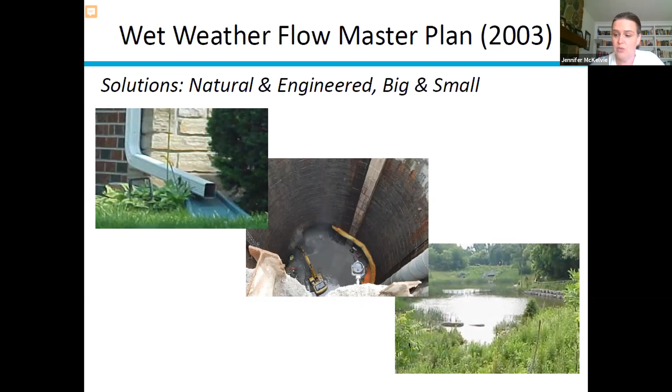In terms of the measures, I mentioned they're on a wide variety of scales. At some of the more localized levels, some of the things we're seeing are mandatory downspout disconnection. Downspout disconnection is mandatory citywide unless you can get an exemption on the basis that it would create a hazardous condition or is not technically feasible. That approval would be through the general manager. The bylaw is applicable to all buildings, including residential, industrial, institutional, and commercial.

I can tell you all of the houses in my community, we've all done that. I've done it as well. I still need to move one of my eaves troughs though, because every winter the mailman puts a note saying, can you please remove the ice that comes out of your eaves trough? So that was the one downside of it, we still have some work to do on that, but everybody has disconnected.

The second is the wet weather flow management guidelines. So there are guidelines that set out objectives and requirements for stormwater management for new and redevelopments, including looking at the water balance, water quality, water quantity, among other things. And this is incorporated into the Toronto Green Standard. And we can't set building codes, but we do have standards, and we do try to really encourage full adoption of those.

We have the Green Street Technical Guidelines. So Toronto's Green Street Guidelines provide guidance, standards, and selection tools for the planning, the design, the integration, and the maintenance of our green infrastructure options appropriate for the city streets. And there is an example here on the bottom of a rain garden, and these are sorts of installations that we're putting throughout the city so that we can start to retain waters rather than having them run off into the sewer system.

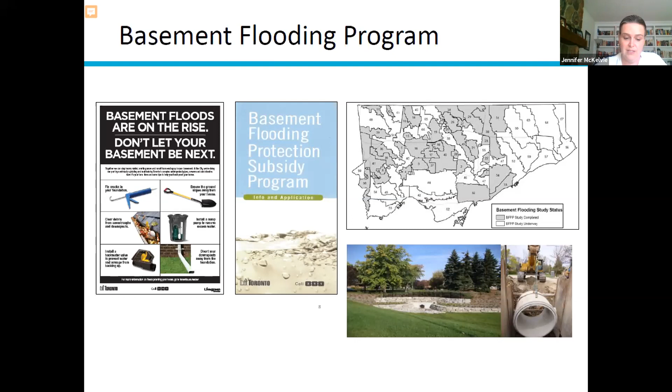And the basement flooding protection studies recommend upgrades to the city's sewer system, overland drainage routes, and improving flood protection. There are 67 flood protection areas shown on the map. 42 have been completed to date, and 25 studies are underway. And so these, again, are a wide range of programs. So there's, at the localized level, encouraging homeowners to make the changes. There's also storm sewer upgrades that are happening, underground stormwater tanks, and stormwater management plans being rolled out across the city in these areas.

But the big problem we have through the older areas in Toronto is the combined sewer overflows. And I remember when I was a kid, after a rainstorm, you could never swim in Lake Ontario. And I thought it was because of all the geese and the geese poop that got in, and so you couldn't swim. Now I know, as I age and become wiser and learn about our stormwater management, it's actually because of the combined sewer overflows that happen.

So some of our city's areas have combined sewers in which there is only one pipe that carries both sewage and stormwater. So unfortunately, when we have very large rain events or melt events, there is just simply too much water in the sewage system, and there is a release valve, so to speak, where it's discharged into our streams, unfortunately untreated. And these combined sewer overflows were designed to act as a relief valve, as you all know, but they do lead to flooding of properties, public spaces, and the overwhelming of our sewage treatment plants.

And certainly, again, this just speaks to designing our infrastructure at a time where we weren't thinking about the population growth to the same extent that we saw, nor really the wilder, wetter weather that we're seeing. So this, again, speaks to why now, as we're designing infrastructure, we're trying to think with resilience about all of these different future things that we could be subject to. So the big impacts, I think we all know, the one that I always remember most is the no swimming in Lake Ontario.

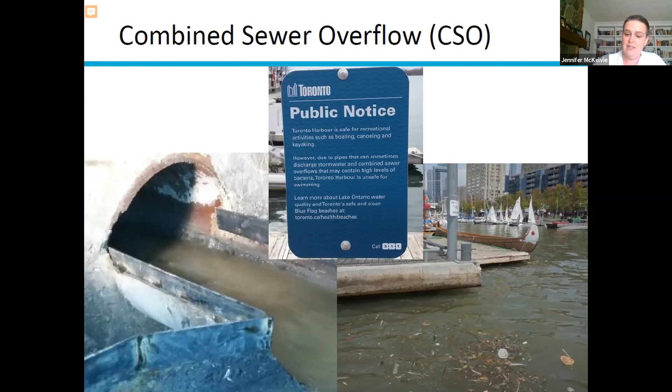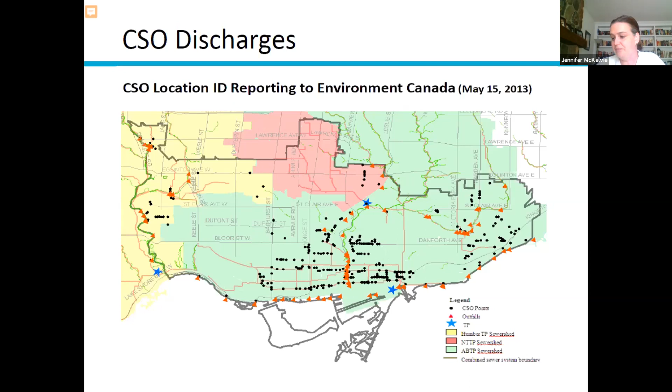So the city dug deeper into the Don and central waterfront. It's a 267 square kilometer area. 1.2 million people in Toronto live in there, and our total population is about 2.9 million. So it is heavily dense, and 30% of the sewer systems are combined through this area.

The big problem that we're trying to solve: in 1987, the International Joint Commission identified that the City of Toronto's waterfront is one of the 43 polluted areas of concern in the Great Lakes Basin. So it's a big stain on our beautiful city that this is the case. Poor water quality in the Don, the Inner Harbor, Taylor Massey Creek are a result of these combined sewer overflows.

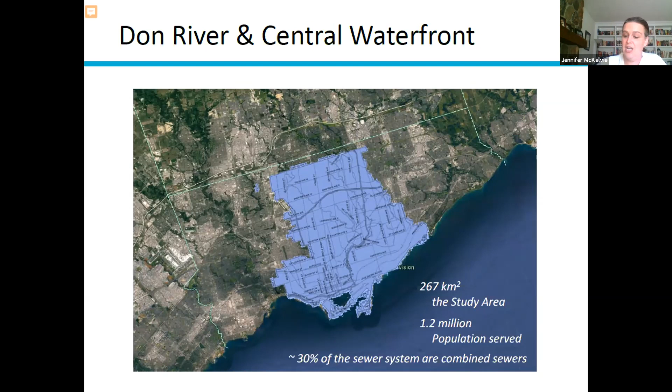There is also going to be a future high rate treatment plant facility that will be in production probably later than 2030; that needs to be updated. Upgrades are happening at the Ashbridges Bay water plant. This is a new integrated pumping system, a new outfall, and new UV disinfection. So this is the largest combined sewer overflow project of its kind in Canada. It's a significant component of the wet weather flow master plan.

And the overflow tunnels, it's an integrated system of tunnels, storage shafts, coupled with the high rate treatment plant. And so it's really dealing with that overflow that happens and managing that. It's phased implementation at a cost of $3 billion, and it's expected to be completed in 2038.

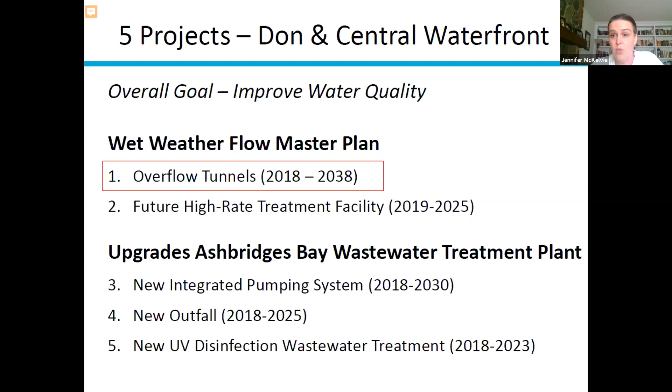I will note that Toronto Water does an exceptional job with the way that they finance their projects. This project is entirely funded through the city's water rate. So the water user is paying for it, and funding from the development charges. We have not received any federal or provincial funding on this project to date.

So the 3 series of tunnels are being constructed in 3 stages. The first is the Coxwell Bypass tunnel, which I'll show some photos of, and that's underway right now, followed by the Taylor Massey Creek and the Inner Harbor West tunnel. They will capture, store, and treat a mix of rain, snowmelt, and wastewater to keep our Toronto waterways clean.

These projects will virtually eliminate combined sewer overflows and stormwater runoff into the lower Don River, Taylor Massey Creek, and Toronto's Inner Harbour. So we're looking to significantly improve water quality in these areas, enhance recreational uses, no more closures of swimming on those big rainy days, improve aquatic habitat for fish, reduce the nutrient levels and loads into Lake Ontario, support the revitalization that's happening all along the waterfront, and help the city meet those provincial requirements for controlling combined sewer overflows.

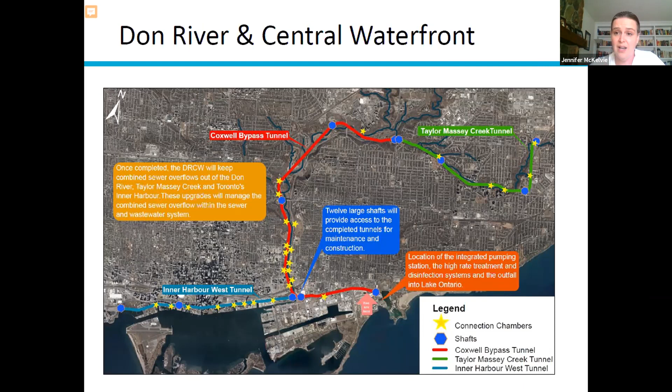Really, this is about improving capacity in the system so that we can service the population growth. And that's the growth to come, but also the growth that we've already had since the system was put in place. So here's a deeper dive into the Coxwell Bypass tunnel.

The construction on this started last year. It is a 10.6 kilometer long, 6-meter diameter tunnel at a cost of $411 million. It is designed to keep stormwater runoff and combined sewer overflows out of the Lower Don, Taylor-Massey Creek, and Toronto's Inner Harbour. So it will capture that water in the tunnel system. It will transport it for treatment. And there's also going to be incorporated with that some offline storage tanks should they be needed.

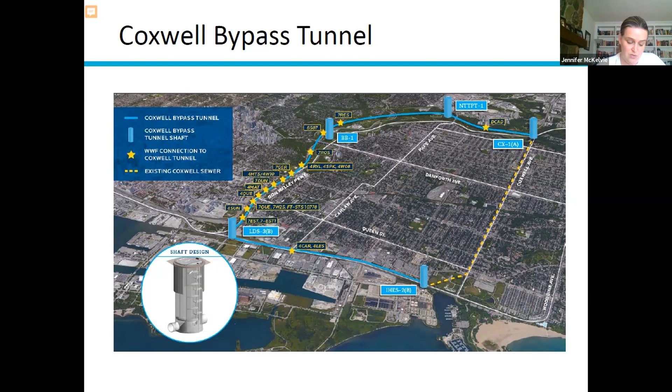The overall benefit is that this is going to carry sewage for 750,000 Toronto residents. So here's some photos of the construction that's taking place. There is an enormous shaft that I had the opportunity to visit last year and go underground. You can see the tunnel was first excavated probably by drill and blast to get the equipment underneath. So the excavated tunnel is down on the bottom here underground.

You know, from my old days as a geoscientist, it was nice to be underground looking at some Ordovician limestones, very low permeability rock, and be able to see, for example, there's not a lot of water seepage that's happening here. These are really, really tight geological formations. It's a perfect substrate to develop this sort of tunneling system into it.

I wished I could find the amount of cement that would be used for this project, because I wanted to tell Enrico that, because I know he's the cement guy. But I will try to find that number and share that with you afterwards.

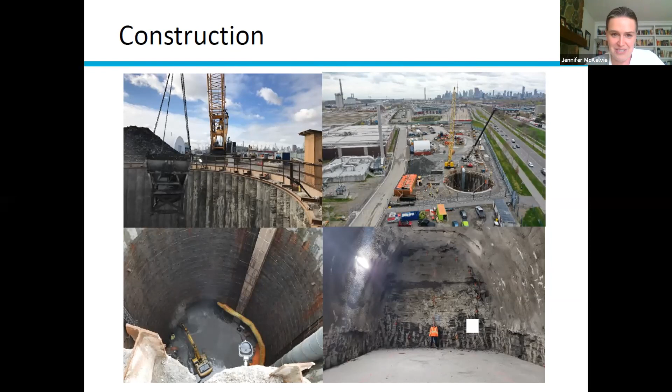And of course, I mentioned that one of the highlights of starting at City Hall was releasing the strategy. That would be the first. I will say that the second highlight was definitely meeting Donnie, the boring machine that will be used to construct this tunnel. So now that the first shaft has been built, as well as that original excavation to get Donnie in and started, Donnie is underway, chugging along. So that's just a high level, some of the engineering projects that are happening in the city of Toronto to control stormwater. Not my forte.

The next series are definitely more aligned with my previous world in geoscience. So I'm very happy that when I was first elected in 2018, Mayor Tory asked me to be the Ravine champion and to work on this project specifically to get the funding that we need to complete the work there. Here's a photo of our ravines. If you've been to Toronto, you know that we have these glacial sediments, very easily erodible, that are on top of that limestone. They create these beautiful escarpments and expose these wonderful sediments that people come from all around the world, frankly, to study. So they're beautiful, they're geologically important.

They've been carved down over generations, and they also are very important natural infrastructure for the city of Toronto, which we have frankly taken for granted for generations. They provide sinks for carbon, they purify our water, they provide a home to many species, and importantly, they make us more resilient to extreme weather events such as those that can cause flooding.

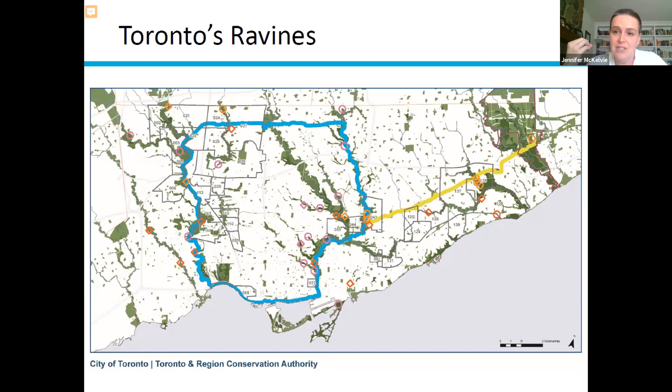The last thing I want to point out on this map is that the areas in the boxes, these are our neighborhood improvement areas that have been identified in Toronto. So these are areas with low incomes. These are areas with low employment, and areas where we certainly have more people in apartment buildings that need the opportunity to get outside. And so we are also strategically trying to create more parkland in those areas where we have lots of people in apartment buildings, because again, it links with resilience. We know they're going to have hotter temperatures inside those apartments going forward. We need them to be able to get outside as well.

So what the Ravine Strategy did is it recognized this area has been really underinvested for a long time, but it also recognized that we have so many different people that are participating and working in that space. So Toronto Water has sewers that run into them and discharge. Transportation manages the bike trails that run through there, for example. Toronto and Region Conservation Authority is responsible for flood protection work, erosion control work. City planning is involved in what we do in these spaces.

Parks, forestry, and recreation, well, the forestry side does the maintenance of that. They also do the invasive species work, and then any recreational opportunities that are run in there are done by them. And then economic development and culture also is looking at how they can use that as a tourism opportunity, for example. So we have all these different groups that were working in different ways. The plans weren't always overlapping.

So for example, Toronto and Region Conservation Authority may go in and repair some trail erosion. Well, that might have also been a good opportunity to do the invasive species at the same time. It might have also been a good opportunity maybe for Toronto Water to do some upgrades. So this is really about trying to ensure when we go into an area of the ravine, we are all working together on that.

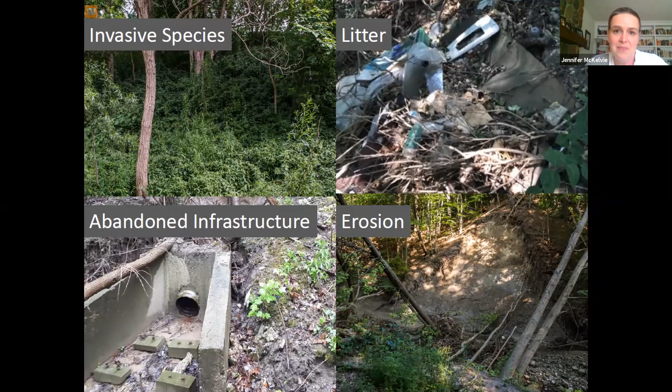And the one word out of the ravine strategy that really pops out is connection. It's about connecting people to nature. It's about providing opportunities for people to connect with each other. And then the ravines themselves need to be connected through these east-west corridors.

We're planting gardens, we're bringing back biodiversity, we're improving those trails, improving the crossings across the roads to make them safer. And we're really using that with residents. They've been leading that role until COVID, a lot of the planting, and we also have urban gardens that are performing in there as well.